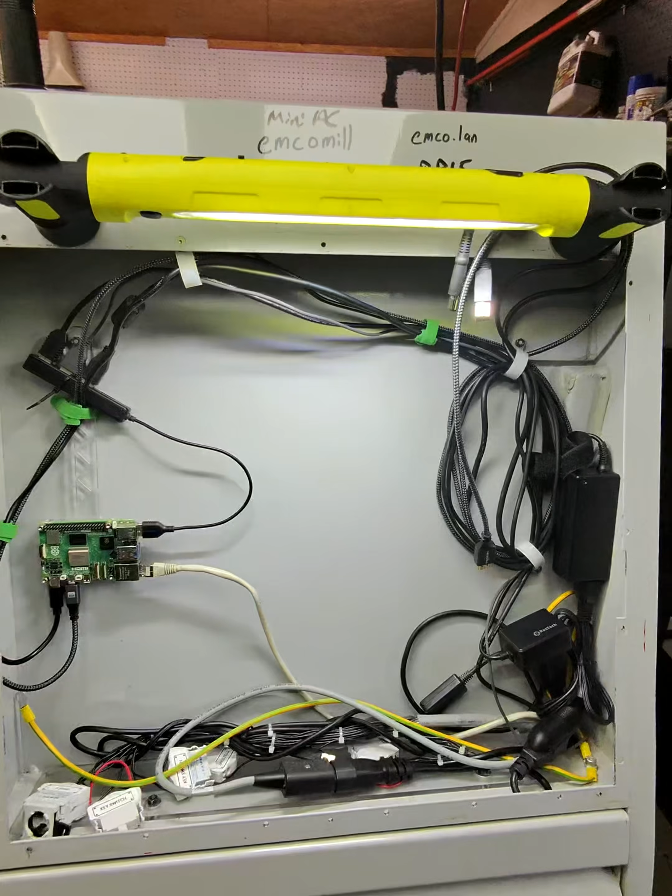Alright, so cleaning up the cabinet up here still. I opted to put the Raspberry Pi actually on these studs here. So these two left studs, I kind of made this little mount out of clear acrylic that goes between to mount it. You know, the button control panel is kind of about here.

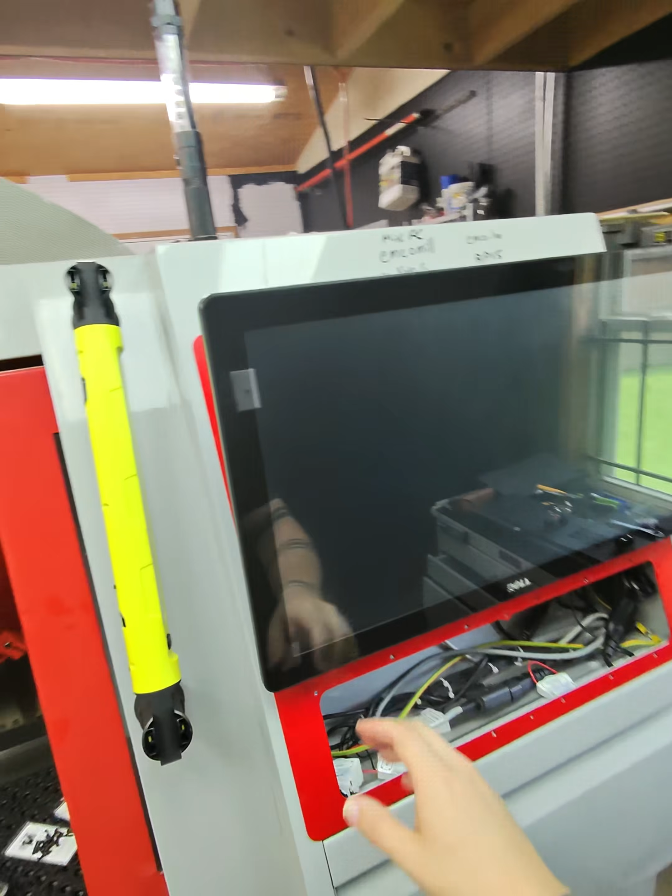Alright, I got the panel and the monitor back up, and then this cleaned up down here really nicely. It took a lot of those cables and stuff, and they're now hidden way up in here, and the Raspberry Pi is right up in there. So I still have access to get in there, adjust cables and stuff as I need to, and I can totally reach up in there. There's still plenty of room.

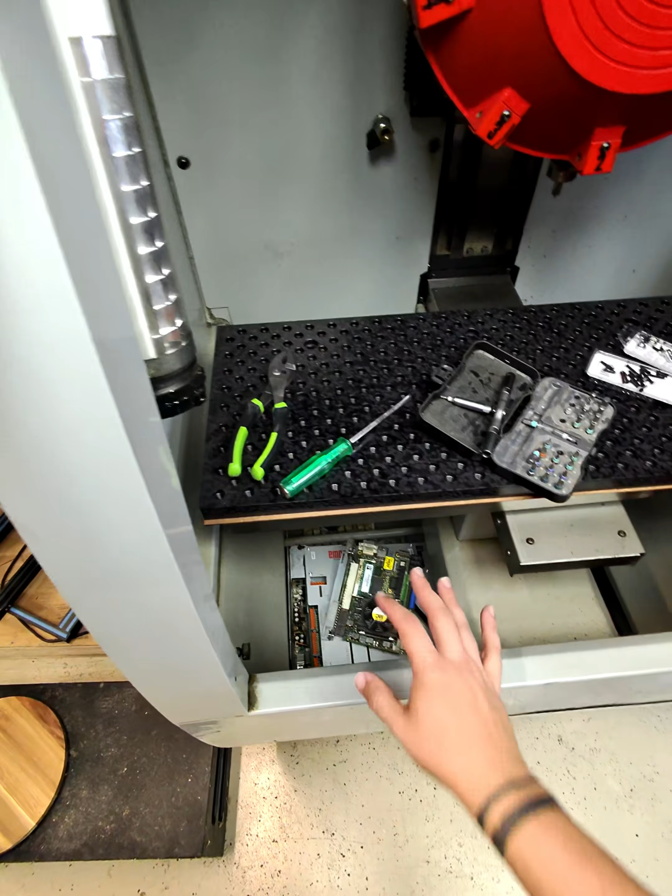I think it's time to start pulling stuff out of the chip bin in the coolant tray. I've just been storing the ATC and all the broken parts that I've taken out of this thing down there, just because I haven't had a better place and they were out of the way and out of the dust. But I think it's time to pull that stuff out, just in case this machine moves and fucks any of that up even more.

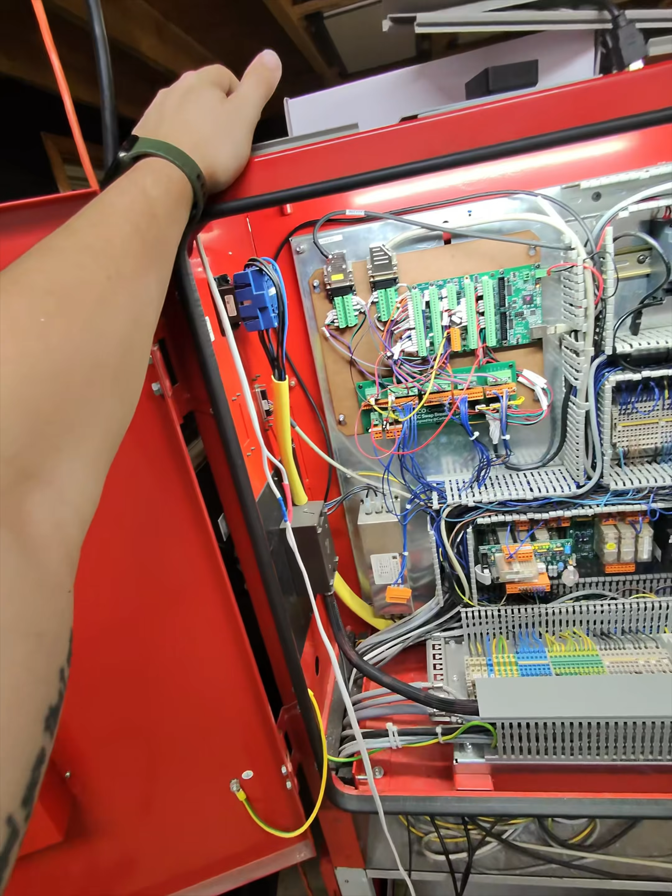Alright, so this one's going to be a little noisy. But this is probably about the 16th time I've rewired this Mesa to this guy. This whole PCB needs to get redone. I've missed some traces and stuff, so I need to do a version 2 of that board at some point. I'm bypassing all of the safety stuff, so the door sensor, the stock e-stop, the agreement button, and that kind of stuff, and I'm just hardline powering what it would consent to fire up.

The stepper drives and the spindle drive, I haven't really touched just yet, but I've got the 3 contactors going here for the stepper motors fired up, and I also had the lube and the coolant one fired up earlier, but I disconnected that just so it didn't kick on. And then over here, you can see I kind of buttoned this up. I didn't put this in there and just got the stock buttons dangling here.

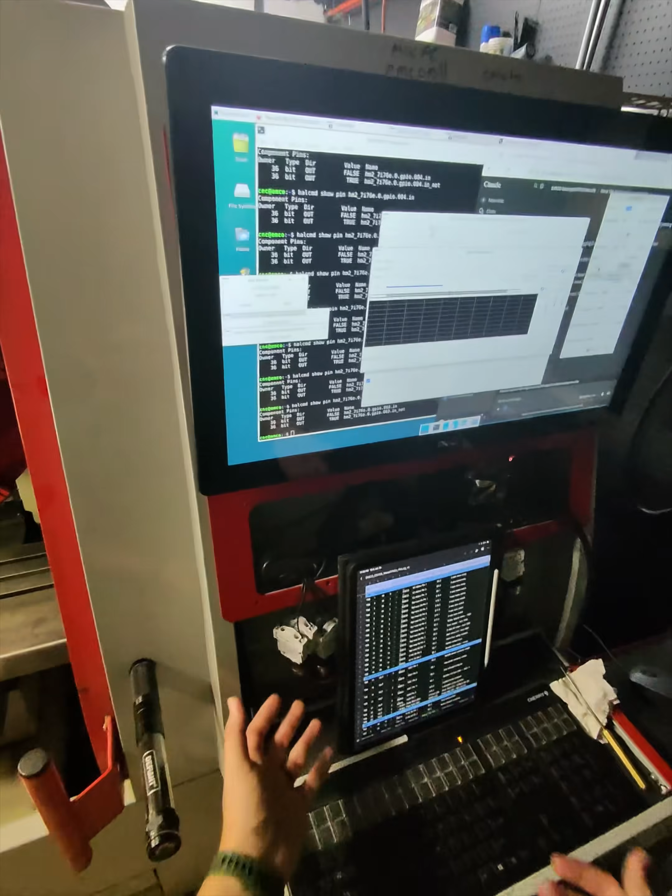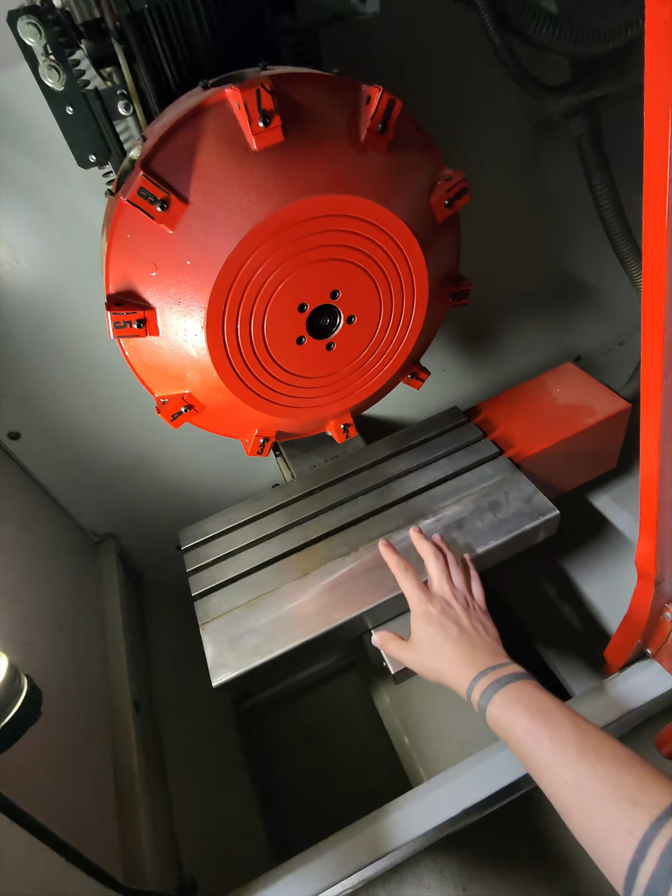But the best part is it moves. It lives. I've been troubleshooting. I got the right calibration in for the X and the Y axis. I think the Z as well. The thing is the X and the Y work. I've got them inverted correctly, they go in the right direction, so positive, negative, positive, negative. The Z, anything I do, it goes down. It never goes up. So that's the next thing.

But I'm so happy with this. This is about 1.5 years in the making. Machine is moving now. We are getting there. So I got one more axis to figure out, and then the limit switches, the home switches, is what I was trying to figure out, and they're a little funky, so I need to dive into that wiring a little bit more. That'll be the next steps, maybe this weekend.

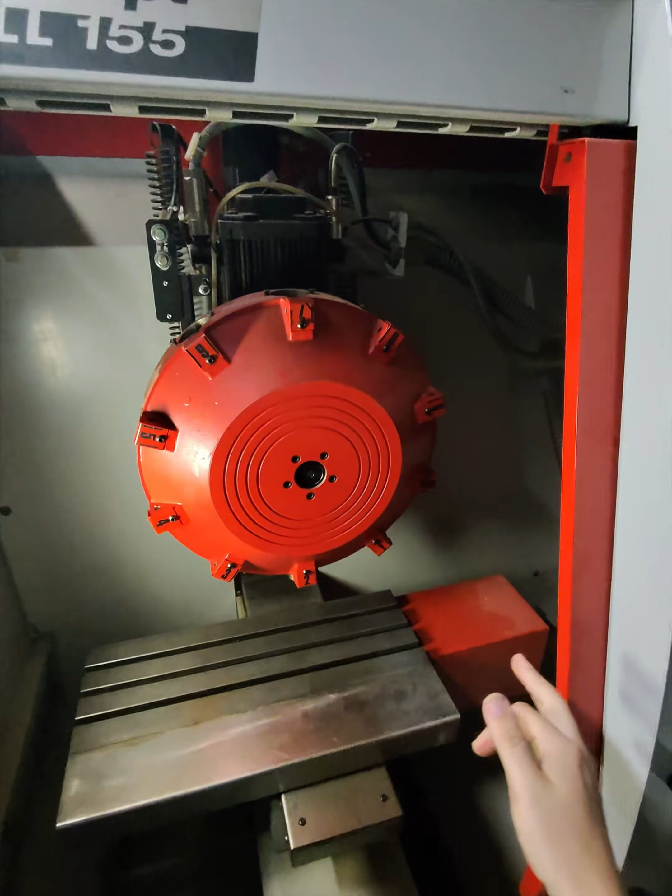But I'm so happy with this. This is a moving machine. That's telling me all 3 of these stepper drives and motors are all working just fine, which is huge. And I had it controlling via LinuxCNC. It's just a lot easier to show it in the PnCconf, because obviously you can repeat.

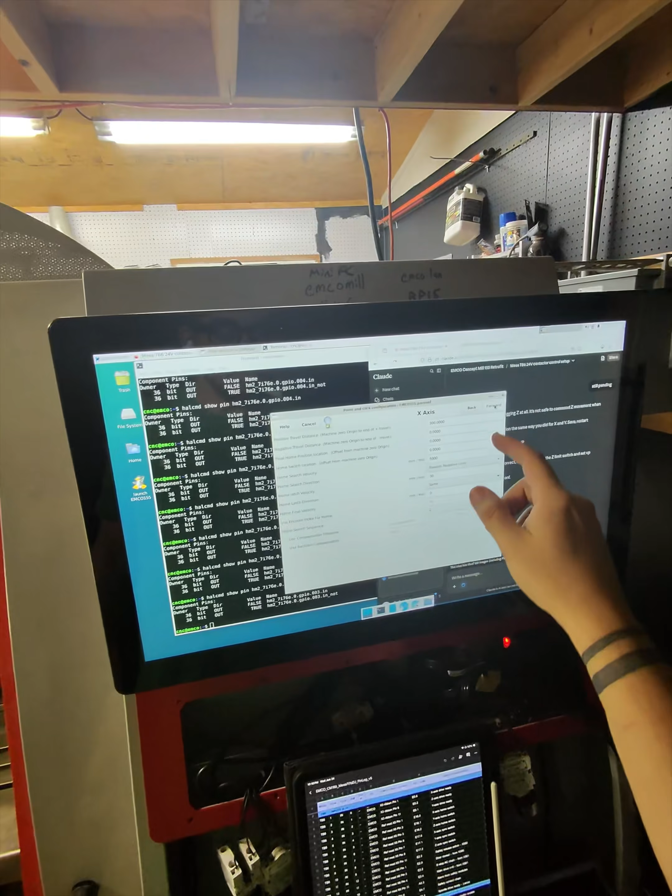And then if I get out of that, just to show you, I'll go into the Y. Touchscreen's working great. Where am I at? Y. Let's enable that. Oop. There's the Y as well.

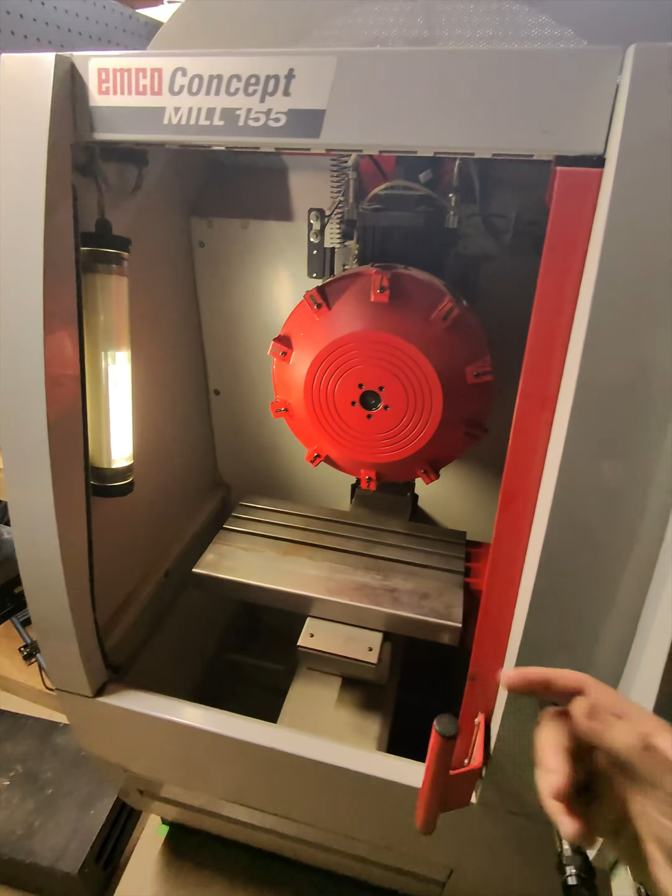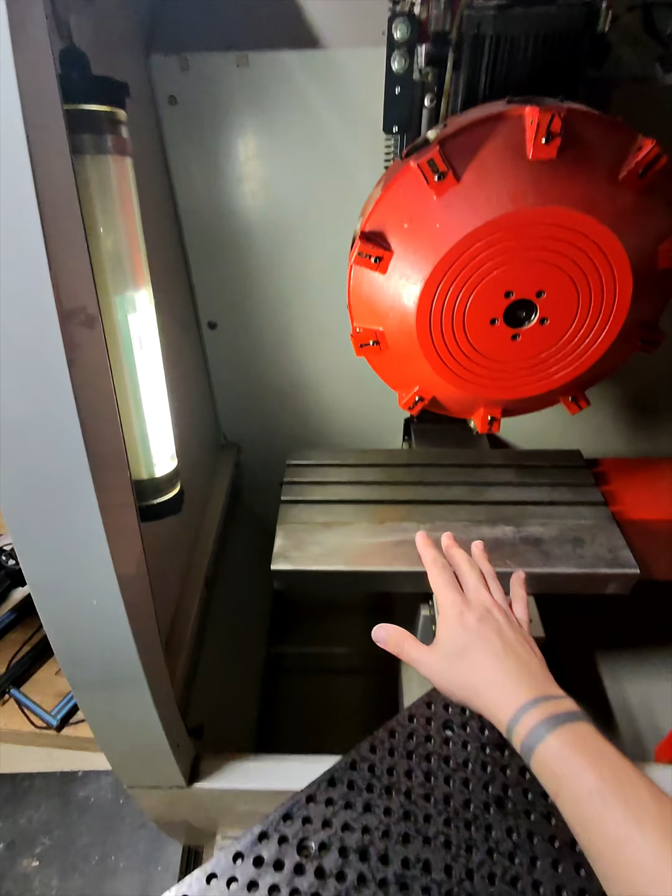Now that I got the X and Y moving around, this actually confirmed finally that my Tormach 770 fixture plate that I bought from Saunders Machine Works will work in here with the travel limits that I have. I can get it bolted up in here. It'll overhang on the right, totally fine. It'll go over the X-axis. It'll butt up nicely to the front and back, and it'll fit, and I'll have extra workholding areas outside of the machine travels, which would be nice.

So excited about that. And then back here, I've got a little bit more cleanup to do.

You can see I've got some wires that aren't run as they should be, but I'm getting there. I've got 98% of this ready to go. There's a wire I had to jump over here, a couple wires here, and a couple I've got to run down and then up to the front of the machine here in a minute.

And then what I'll do is I'll pull this back out, actually swap that to an acrylic back plate, and then add some terminals and zip ties and some cable management to this, and then I can button all this stuff back up once I'm happy. But we're getting there. Excited.

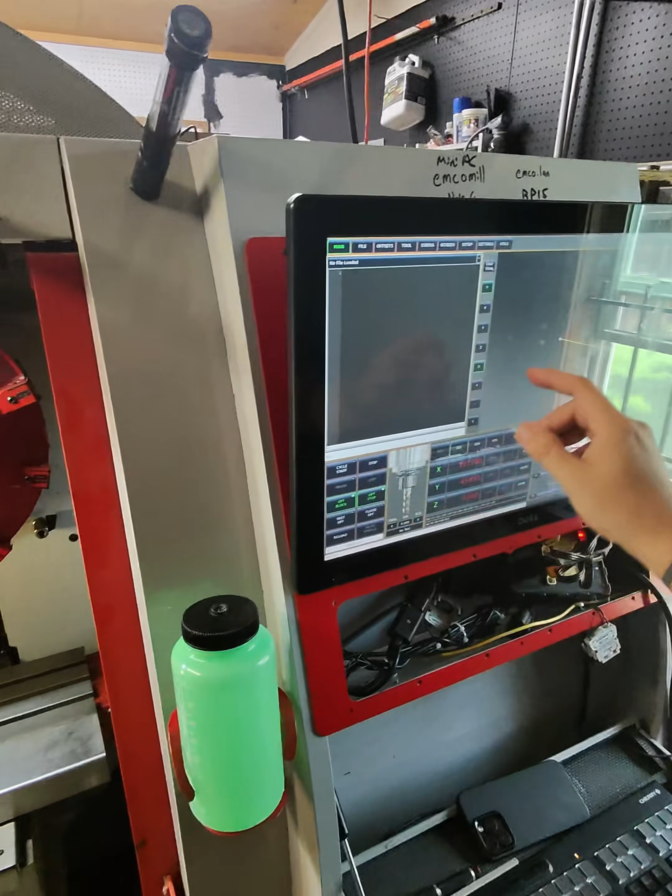Alright people, we are getting there. We've got X movement. We've got Y movement, and they're pretty damn zippy. This is actually slowed down. We've got Z movement, right? Best part is we've got homing on the Z with the latching. It's going to park up at the top here on the home switch.

We've got homing on the X with latching, and it's going to park in the middle. And then we've got homing on the Y with latching, and then it's going to park up front. That's pretty sick. I'm excited about this.

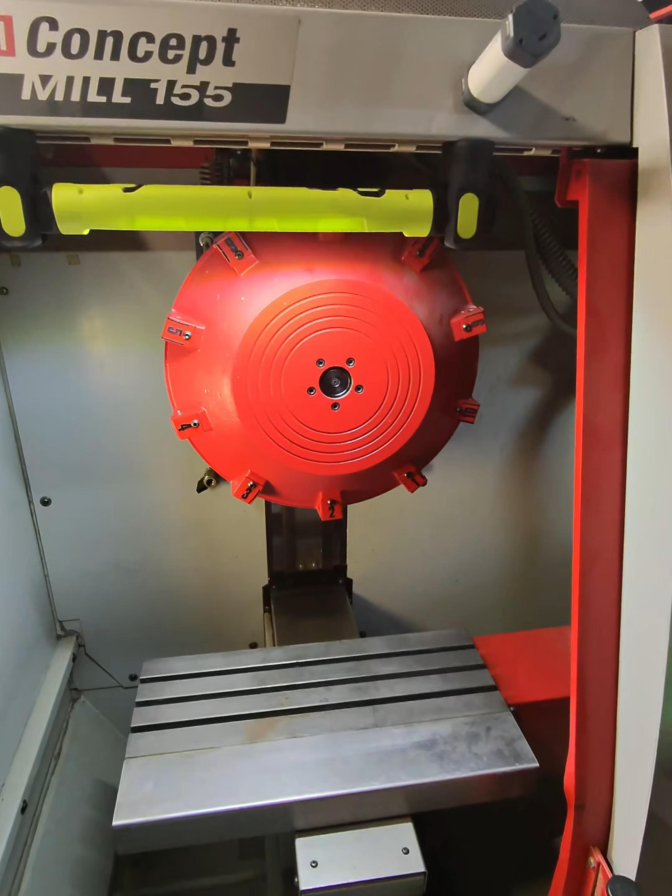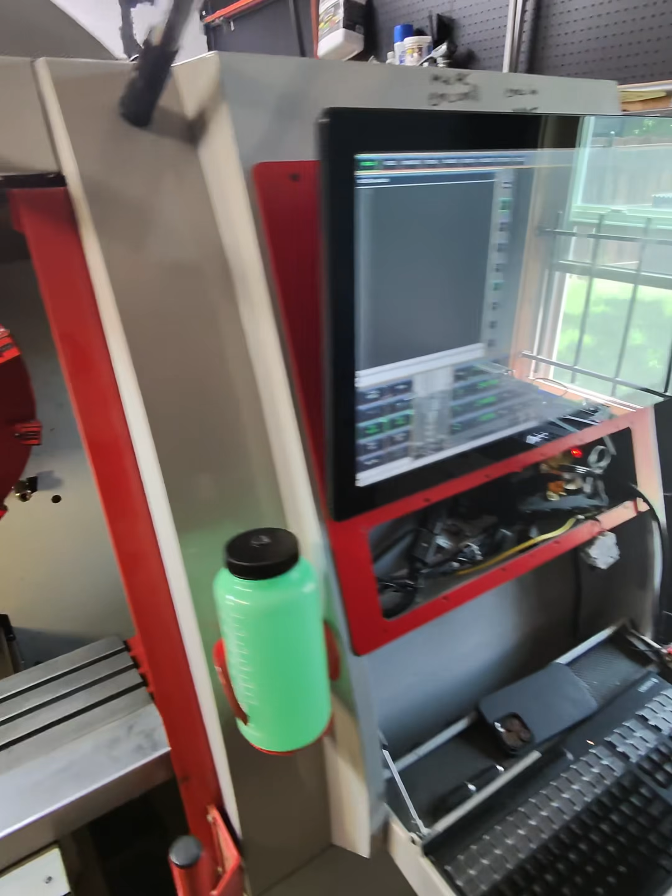This is awesome. Next thing I'm working on for safety is going to be the e-stop, the physical e-stop. While I'm there, I might do the cycle start and feed hold buttons as well, just so I'm running all those wires at the same time, because I'm running new wires to the back. And then I'm going to move on to the spindle, get that going. And then turret. After turret will be buttoning this stuff up with the Streamdeck again, and then once this is buttoned up and all that's going, I think we're ready to cut and do stuff.

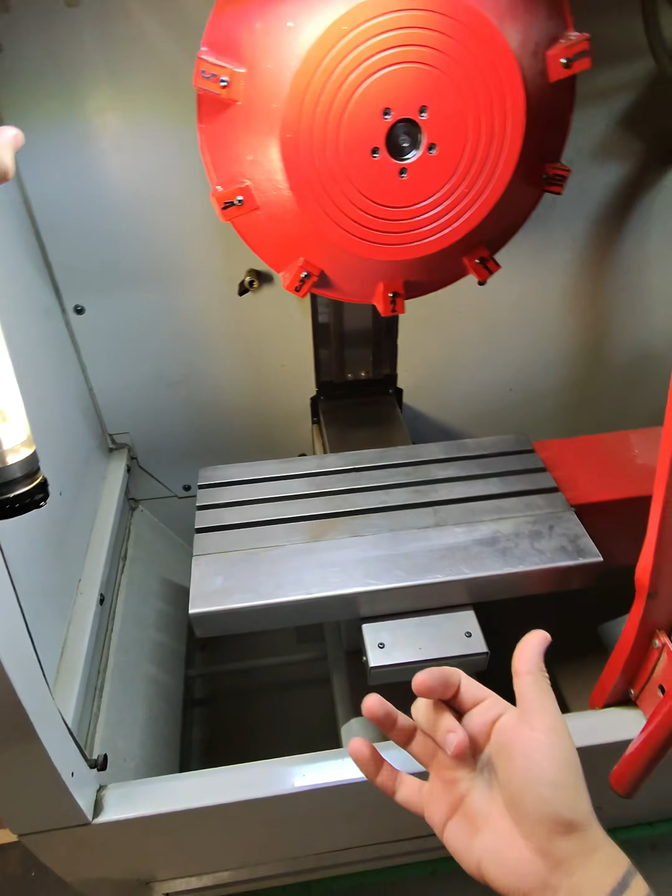The coolant lines are all run. The coolant contactor has kicked on the pump, so I think that works. I've heard the pump for the lube back down in there kick on, so I just need to flush that out. Kind of both of those, actually. I don't have any coolant, so that'll be down the road. But yeah, we're getting there. We're almost ready to see this thing cut and make some chips.

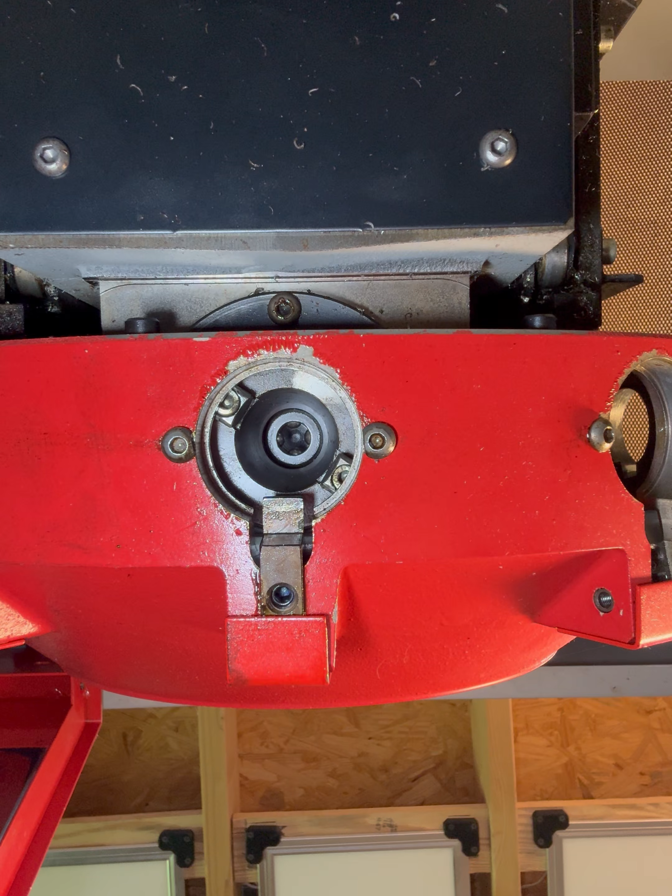So here's a side quest I've been going on. Originally I had my tool holders all in these little 3D printed holders. These are a 2x4 Gridfinity. I could do a multicolor and all that stuff. The experiment was there, but that's not a long-term plan. That's not a great idea. It just wastes a lot of space in theory.

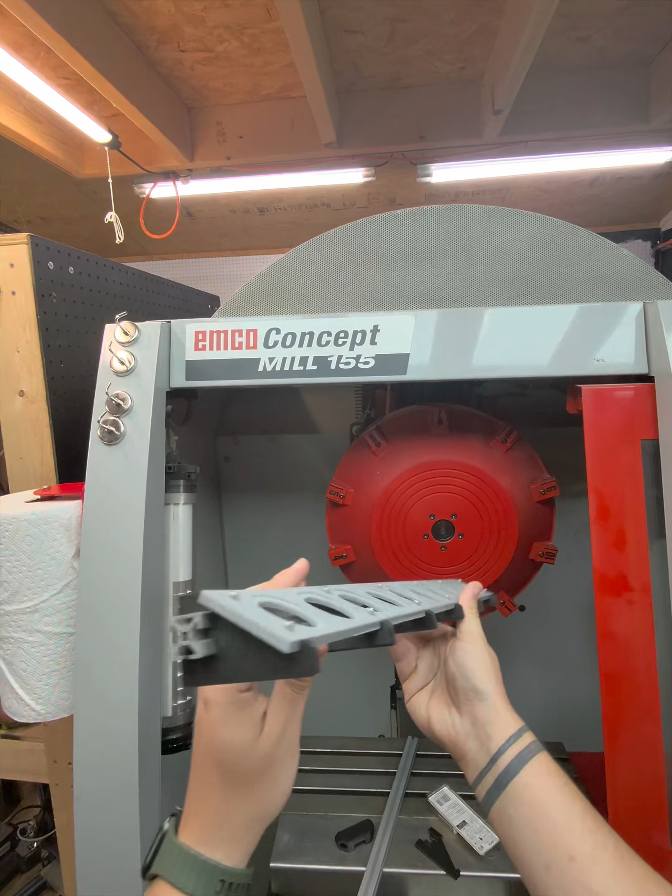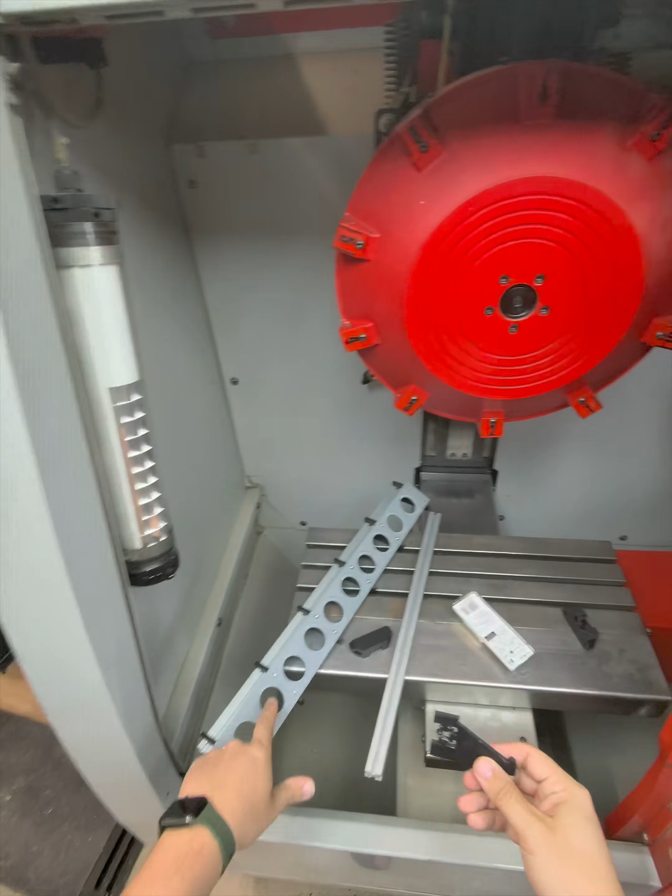So I've been kind of going around and designed up one of these guys here for my tool holders, right? This is just a standard 2020 extrusion length, a custom little support bracket with the cutout here, top for this acrylic here. I think the stretch I did was 5 or 6 of them, and then some custom little end caps there. And then the way this guy works, you can kind of see I've got 2 over here.

All my walls are pegboard, so I spaced these out to fit onto the pegboard. I've got 2 of them mounted up there, just with some number 6 drywall anchors. Got these spaced enough, so I've got the stock 10 tools that my machine came with. These are 10 BT30s that I got after the fact that are ER20s, I think. I'm going to do 10 more, I think ER16s, just so I have some smaller ones to work with, or maybe 5 and something else, room to grow.

Inevitably, 10 of these are going to be in the machine, so one of these racks will be empty, so the goal will be to have room to grow up there. I've already got version 2 of these end caps planned out, so I might change this a little bit, but these have been up here for a couple days now, and they're pretty rock solid with that amount of weight on it. So yeah, there's my tool holders. This has just been kind of a design side quest.

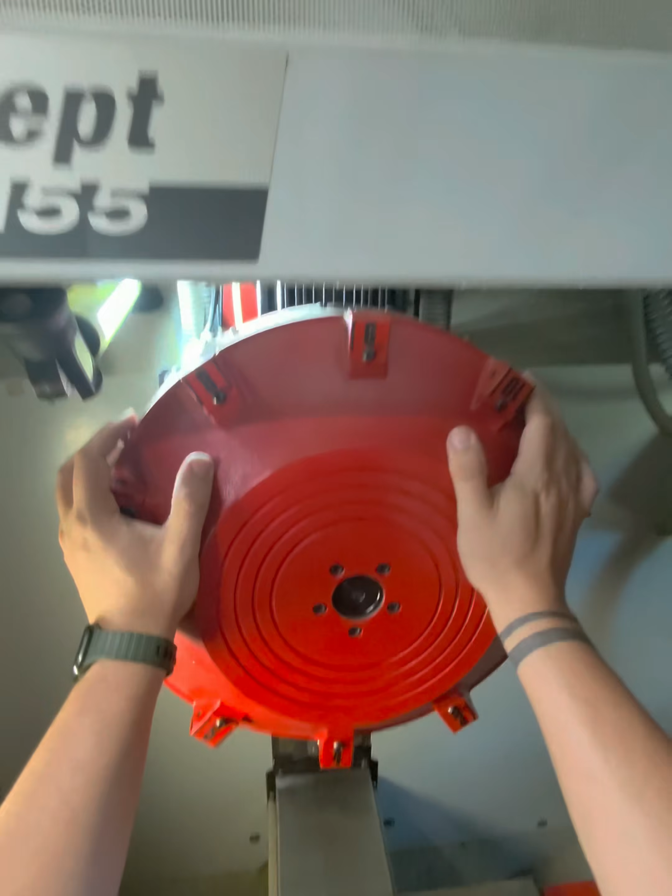The lower ones are engraved in, and the Emco sits in there nicely. The big BT30s will need to get modified, all of these BT30s, to actually fit the Emco. Once they're turned down to size, the bearing slapped on there, these will be ready to go. But future problem, I just wanted them out of the box, out of the drawer, up on the wall. So yeah. All right, a little bit more progress. Check this out. The turret moves.

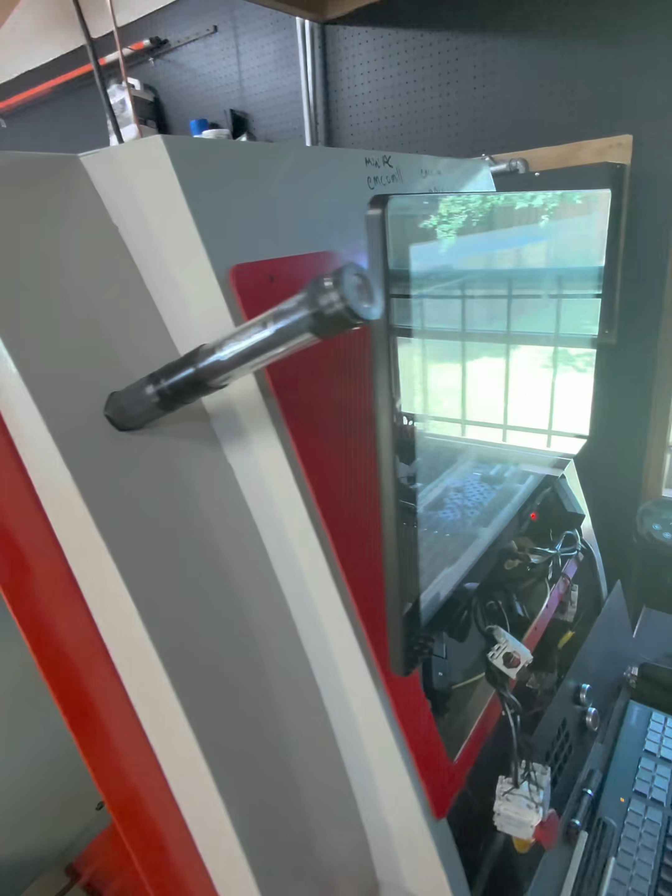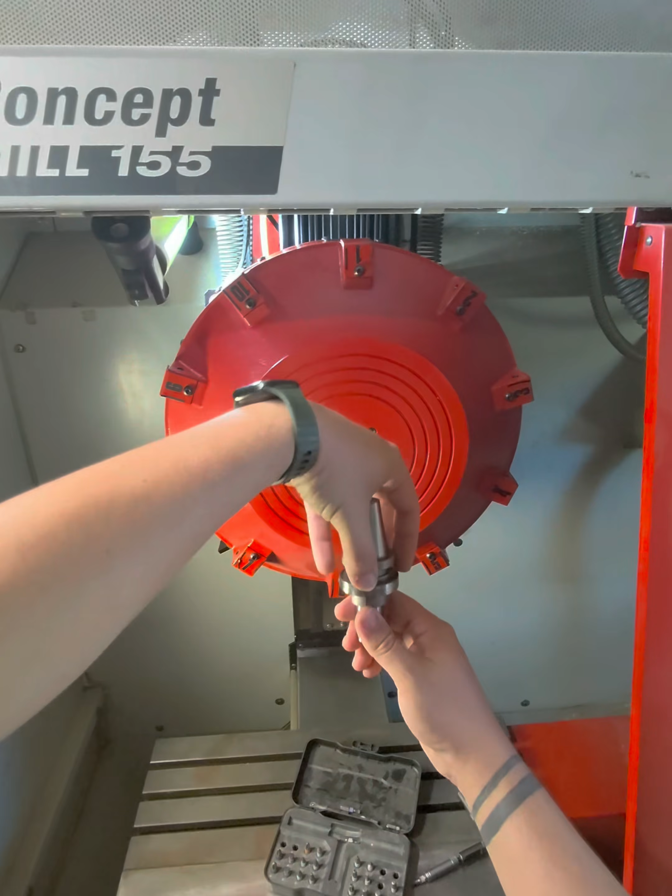Yeah, so there's some slop in this system, I guess intentionally. What I learned, let me stop that. What I learned is the spindle, right, it goes up and down, and it engages into the turret, right? Each tool holder uses the little drive dogs, the drive keys. There's one in the turret, there's one in the spindle nose, so the little bit of slop in the spindle needs to come in and kind of align itself to that.

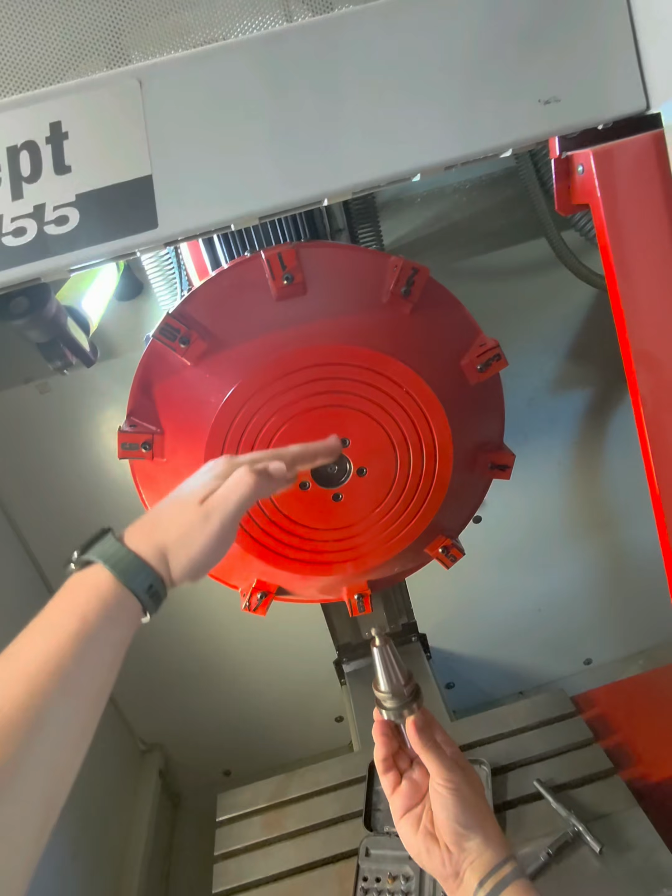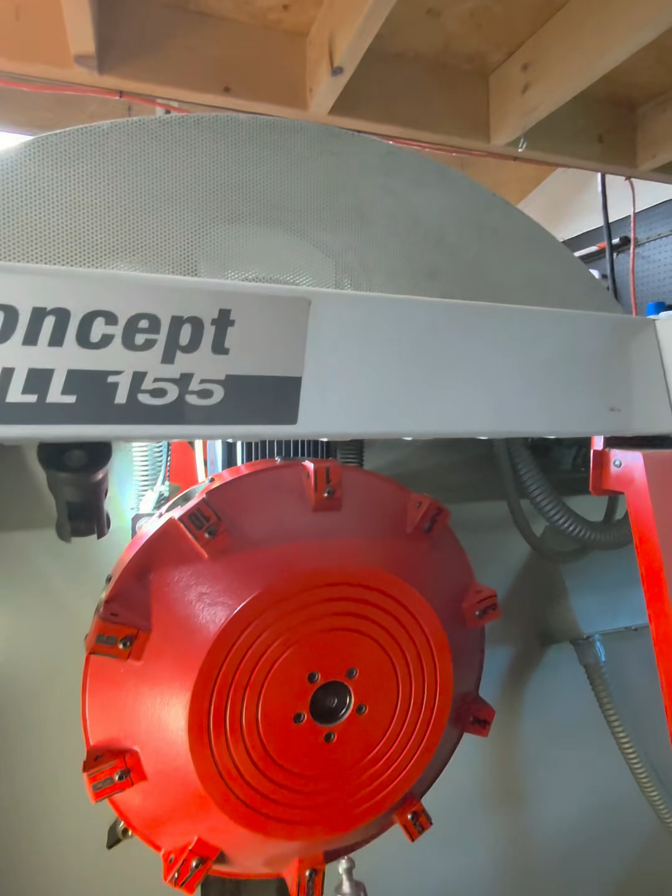So then it's a mechanical drawbar. It's not actually actuated, it's just spring driven, so when it goes below the home switch, it releases the Belleville, or yeah, releases the tension so it locks onto the tool. When it goes above that, it presses in and releases the tension there. And then it goes above that, and then the spindle lifts up. The pinion gear on the top of the spindle meshes into this.

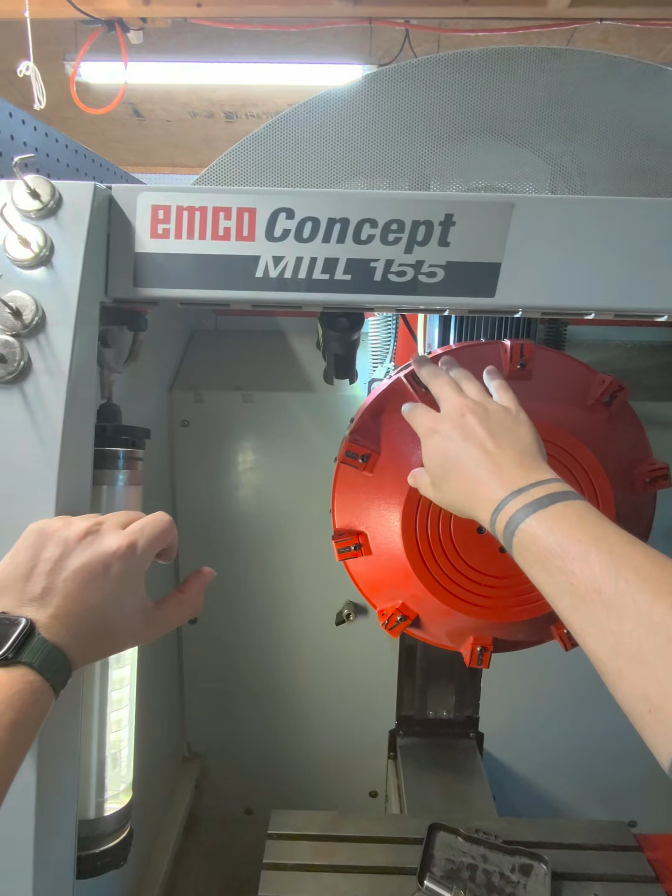So that took a little bit of troubleshooting. I think this makes sense. This doesn't really make sense to me, but the turret is moving. Next step is getting the turret sensors going so it actually knows where it is, what tool, because now that I just did this, it has no fucking clue what tool pocket it's on.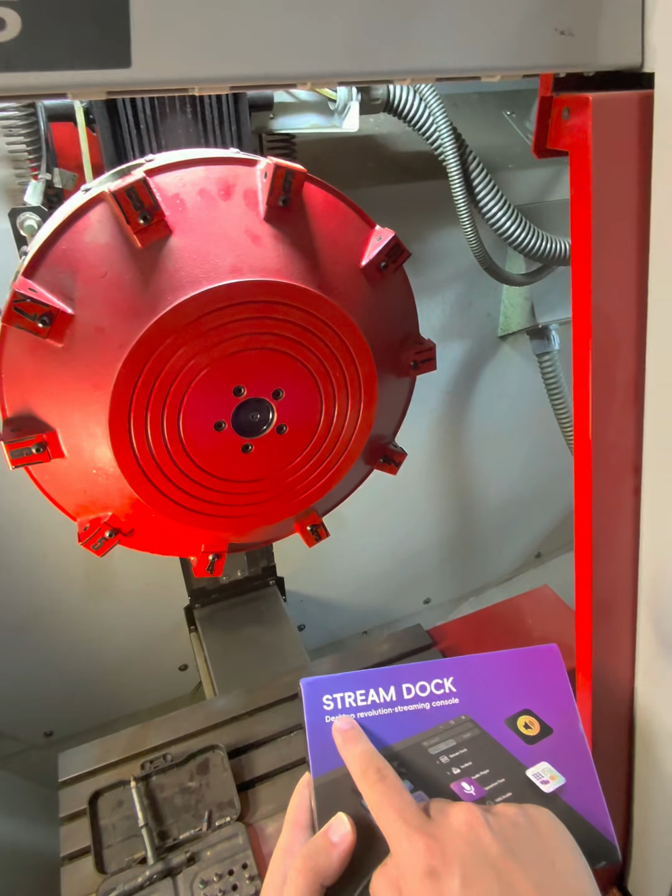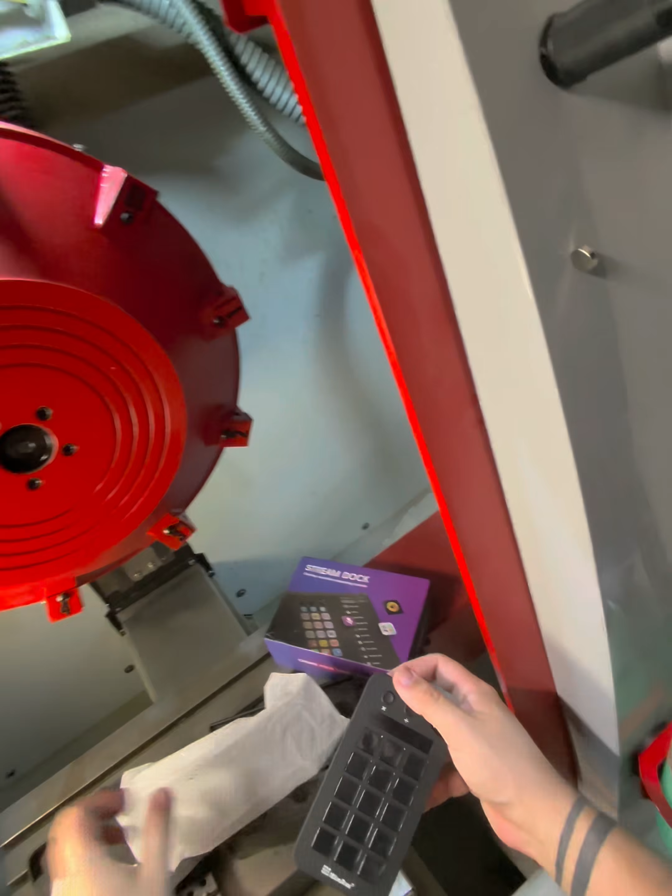Alright, new toy in the mail. This is the Stream Dock, not to be confused with the Streamdeck that's going to go here, the Elgato's. This is straight from AliExpress from China. This is the Stream Dock N1, I think. This one is actually going to become, look at that, a little handheld pendant with the little USB on top.

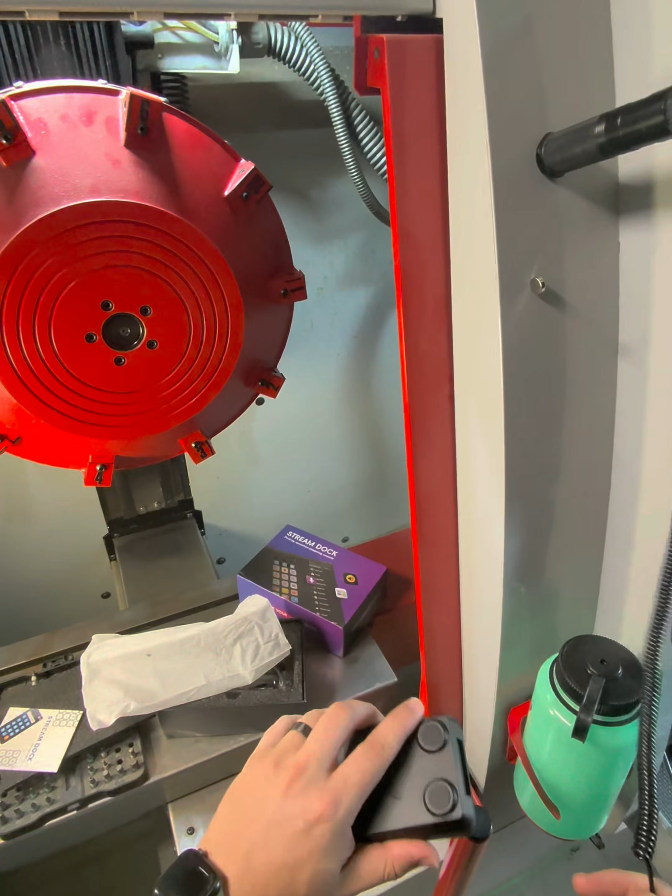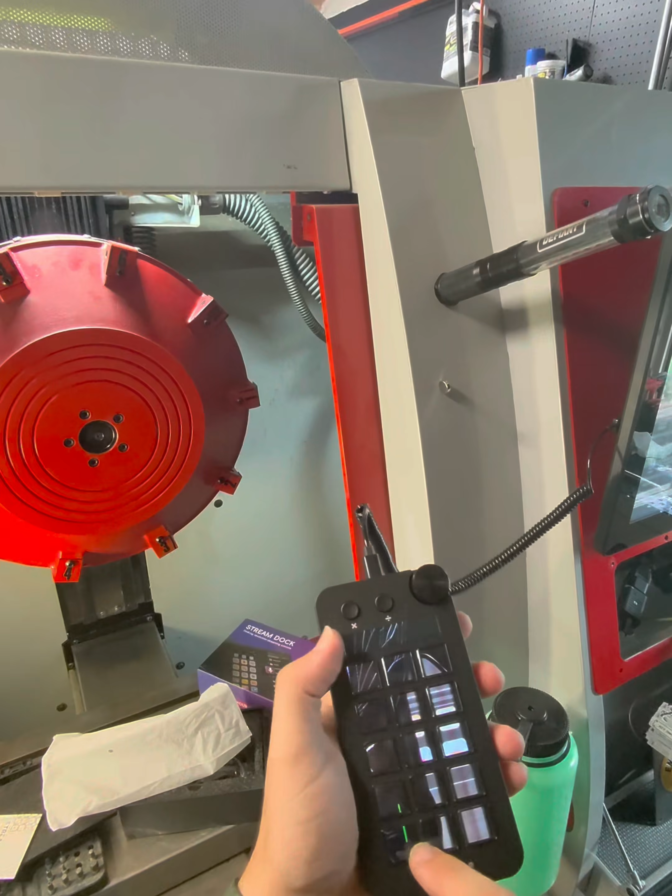With the same amount, the 15 buttons plus 2 more and a full mini display here, and a jog wheel button combo with indents on it. That's a nice in the hand feeling. The bad thing, when I plug this in, the screen back there is broken. So I have a refund of this already processed and a new one of these on order from China. Yeah, you can kind of hear the glass in there kind of shaky, but this feels kind of nice.

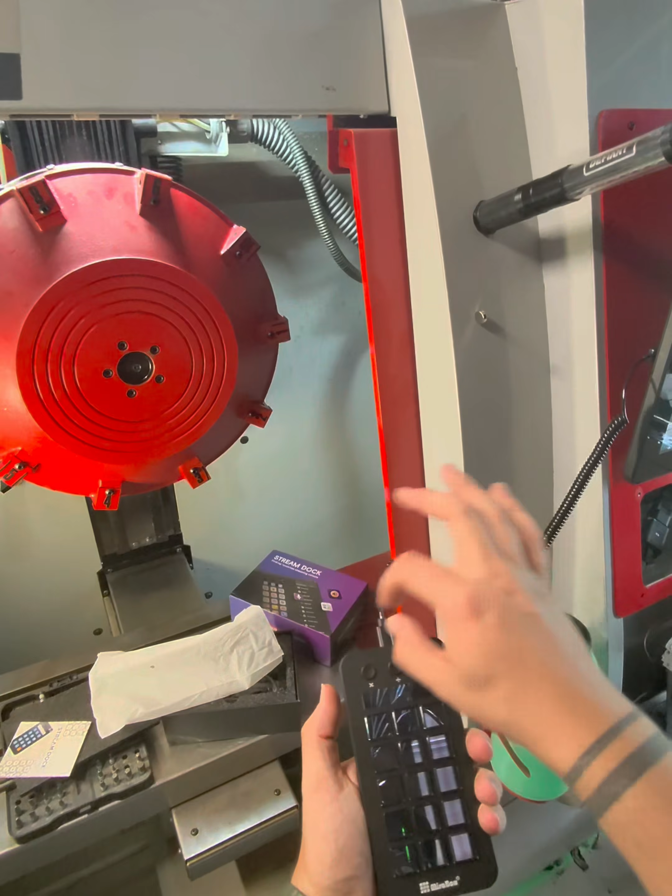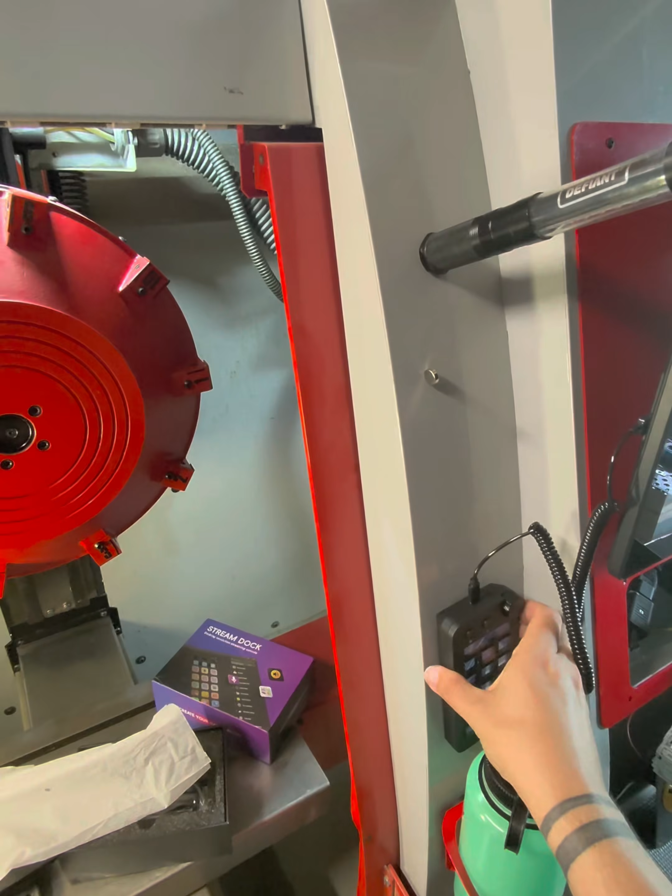Obviously it just can't take a hit, so I think I'm gonna do like a little TPU 3D printed bumper that'll have a little indent for your hand to make it a little nice. My goal is pull these little rubber pads out, put magnets in so that it can stick right there where my water is, right? And then with this little coily USB right to the monitor, this is going to be a nice little spot. Jog wheel, XY, blah blah blah.

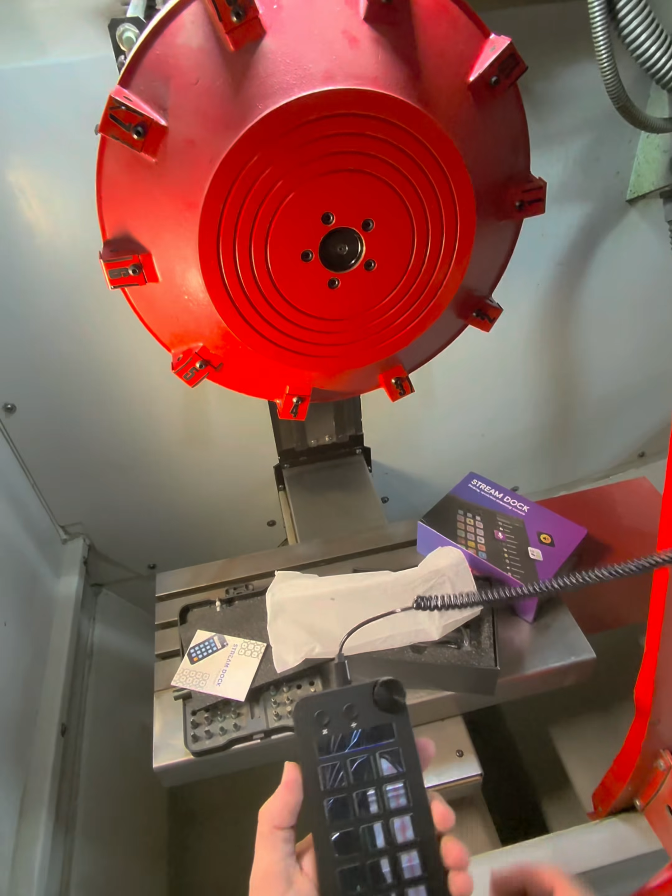This is going to be nice, if I can get one that's not broken. But hopefully that'll be a week or two. This one came within a week and a half, I think, so shouldn't be that long.

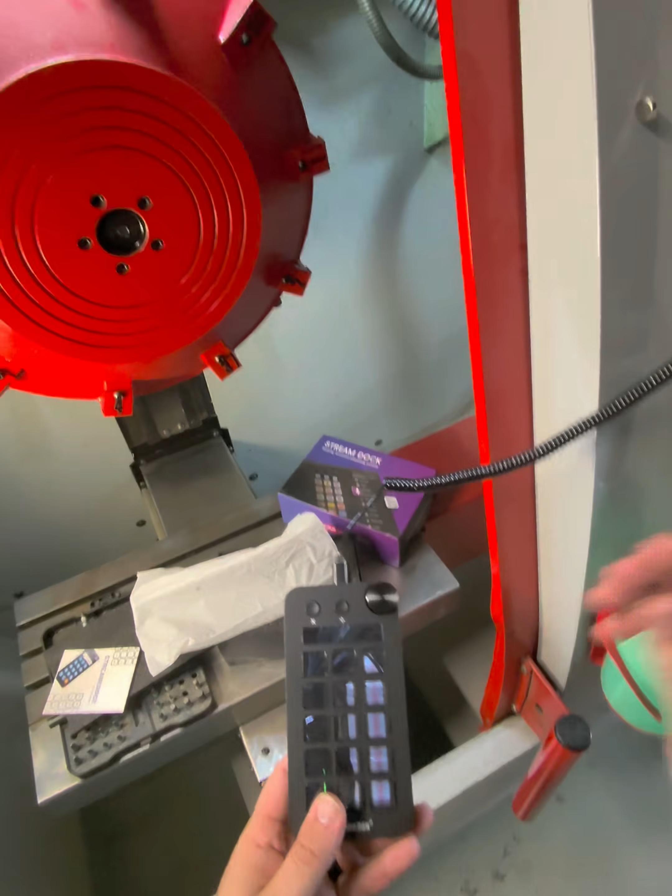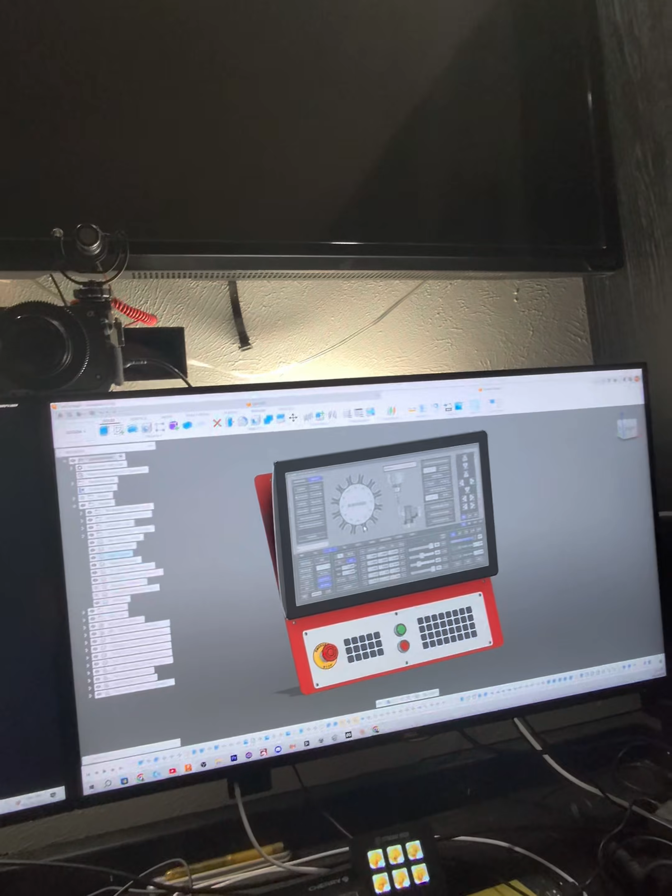So a little late night thought. I was just messing around in Fusion, and I was like, man, I really wish I had a 3D model of the machine so I could slap this on there, or go into the CAM side and get the machine builder built out in there. So I emailed Emco UK at like 11 o'clock last night, and then at 4 in the morning my time, they emailed me a full STEP file of the entire machine.

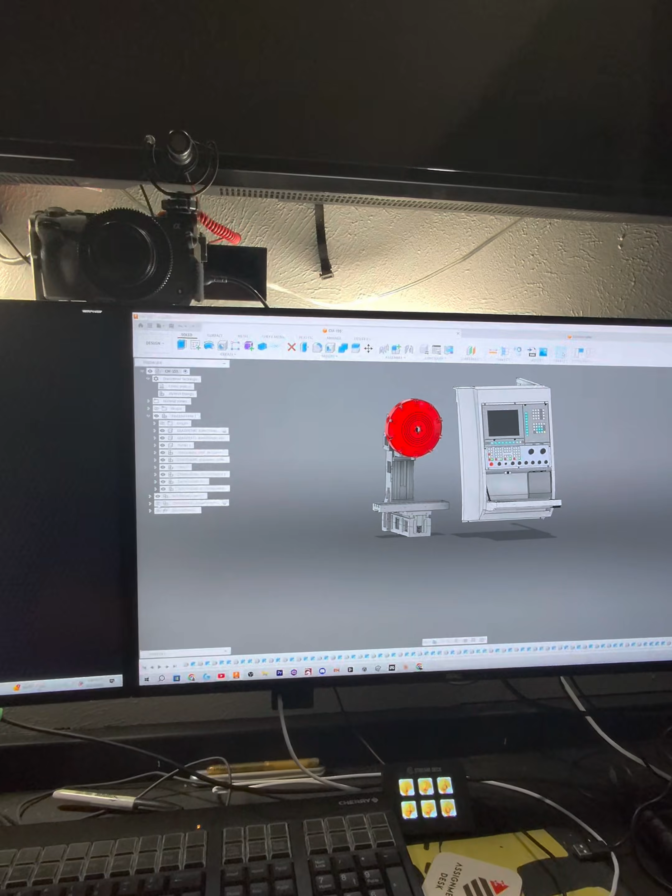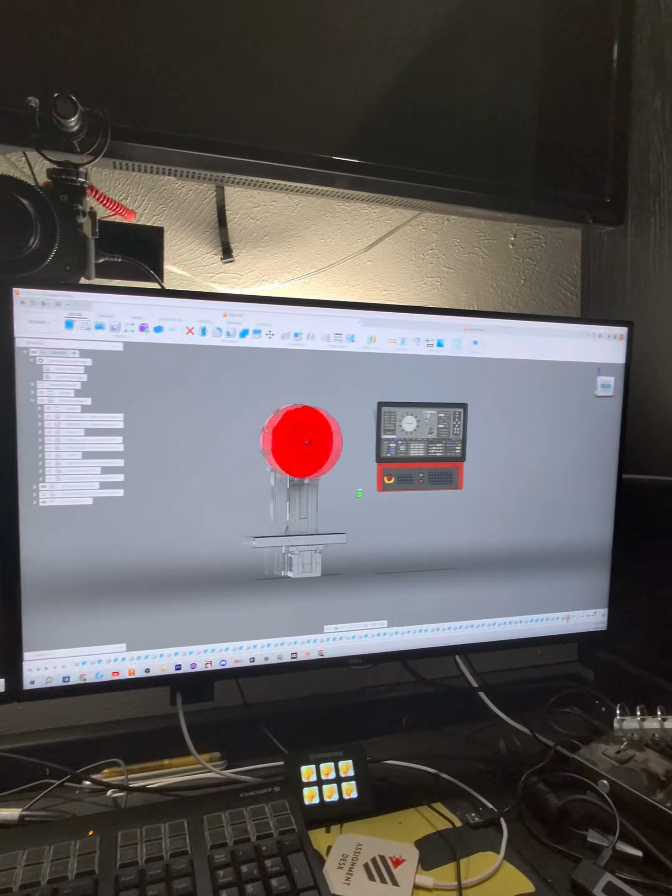That's kind of broken up in a couple different things. You know, the mill itself, all the sheet metal, the control panel side of things. And I can actually go in and, right, here's that stock control panel. I could take that out, and I threw in my control panel for the machine, right? So this is pretty sweet. Pretty awesome of them. So if I take out everything else, now I have this with the turret and the bed to throw into the machine builder and build that out.

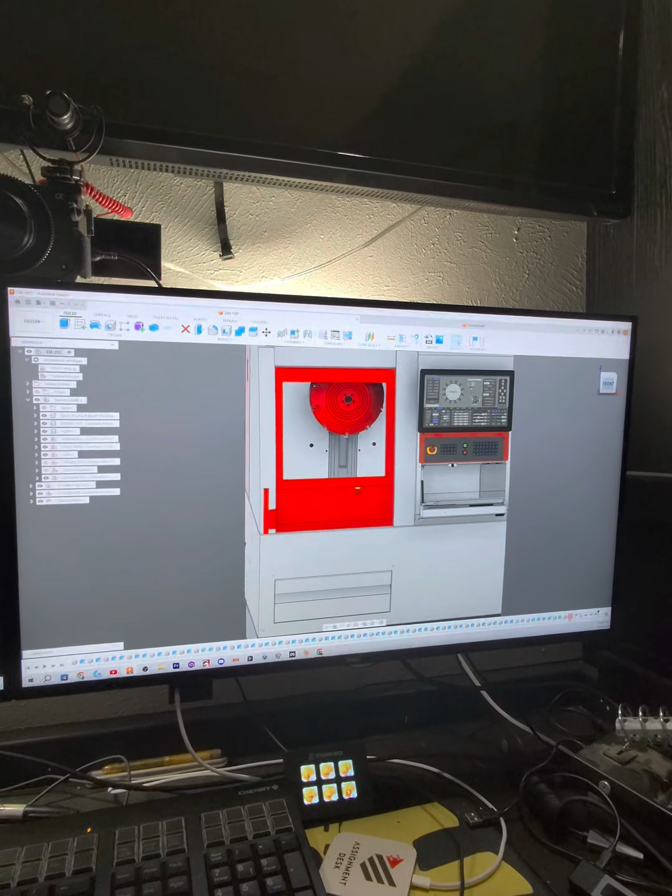This is awesome, and thank you Emco for being willing to share this file, and for sharing it so quick - it's insane. The only thing it doesn't have is the wiring, the electrics, the motors, that kind of stuff. It's really just the sheet metal and the castings, which is totally fine.

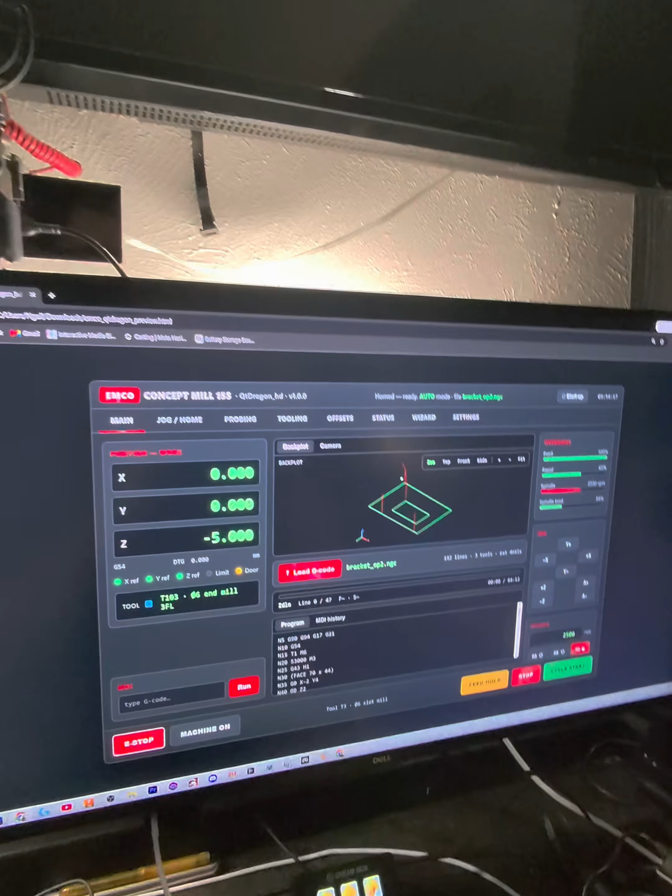It does have the coolant pump modeled in there, but it doesn't have any of the motors or the spindle or anything. It has bearings and stuff, which is pretty cool. So thanks, Emco.

Alright, so I've been playing around with my friend Claude AI, and I've been coming up with this new design for the GUI, the QT Dragon kind of reskin. The thought is I'm going to strip a lot of the buttons off of this screen, off of the touchscreen, because they'll go down onto the Stream Docks.

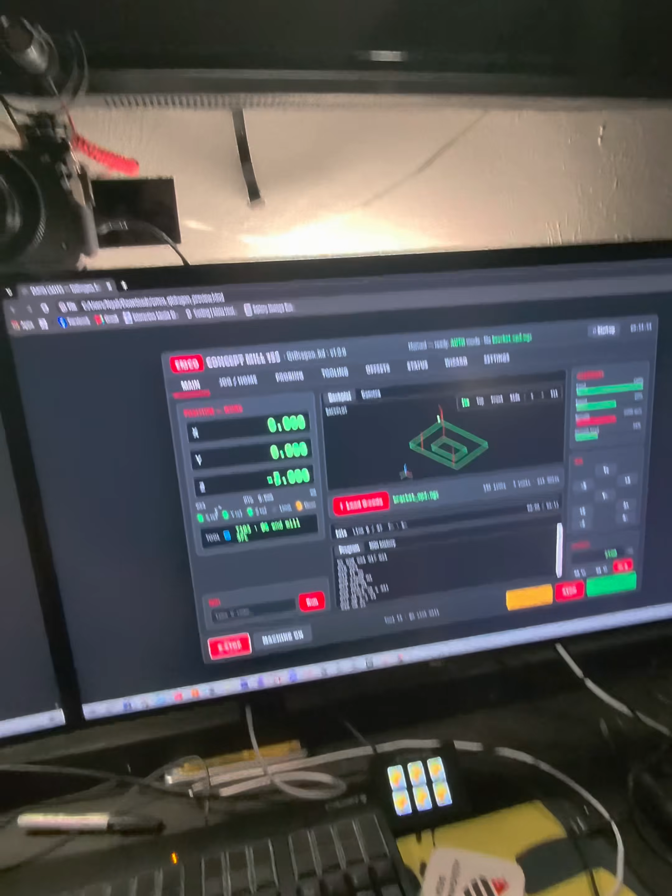So there's going to be some limited button presses up here with some basic functionality buttons still up here. This is kind of the main home screen - the DRO kind of stuff, tool and what tool's loaded, some MDI control stuff, the G code with the MDI history kind of live toggled as I toggle between that, kind of a status one right here in the middle.

I can load G code, kind of the plot with the different views. There's going to be a camera view in here as well. The override kind of graphs and stuff like that. Jogging, spindle overrides, that kind of stuff. Feed hold, stop, cycle start, machine on, e-stop.

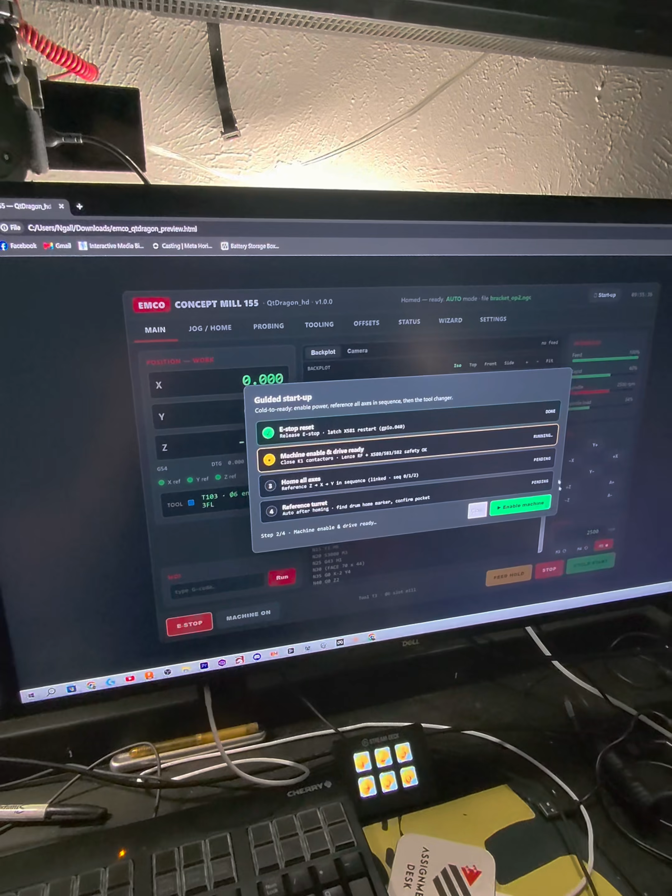We also built a startup routine, right? So it's going to wait for me, but it's all pressed in here. Reset, e-stop, alright, enable the machine, alright now I'm ready to home all axes. It's going to home all axes ZXY, and then it's also going to home and reference the turret as well. That way the machine, from one little GUI pop-up, will tell me everything is homed and everything's ready to go. I thought that was pretty cool. I don't know if it works.

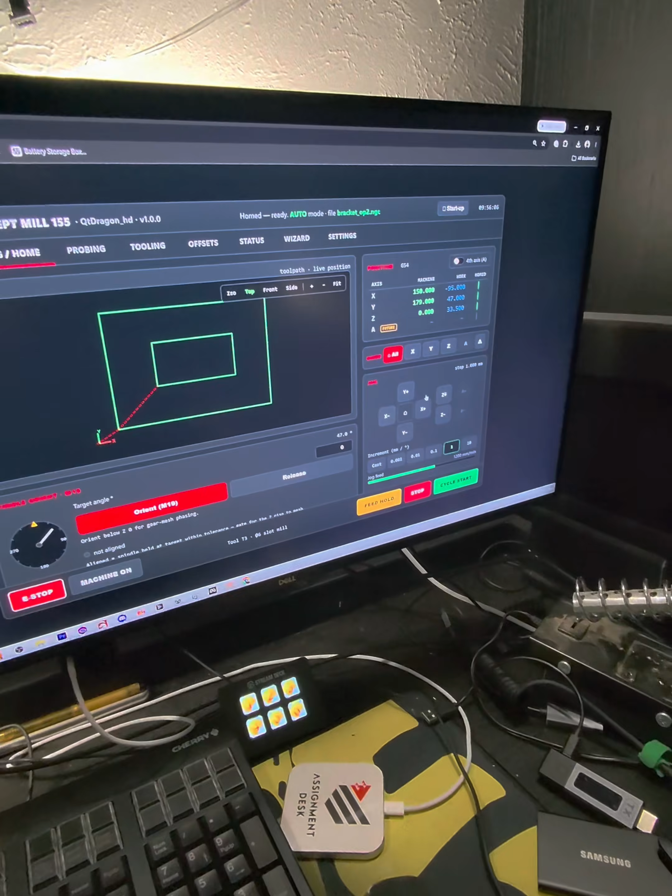Moving on, so we've got a jog home screen with a spindle orient, that kind of stuff here. Can home the axes over here, jogging with the increments overrides. This stuff will be down on that Streamdeck, so I'm not too worried about it not being on the home screen, just a bigger viewport as well.

Fourth axis toggle. Probing screen with some basic probing macros put in, like top, edges, corners, bores and bosses and stuff like that. Rectangle pockets with overrides and that kind of stuff. This isn't baked in yet, it's just kind of the idea is there.

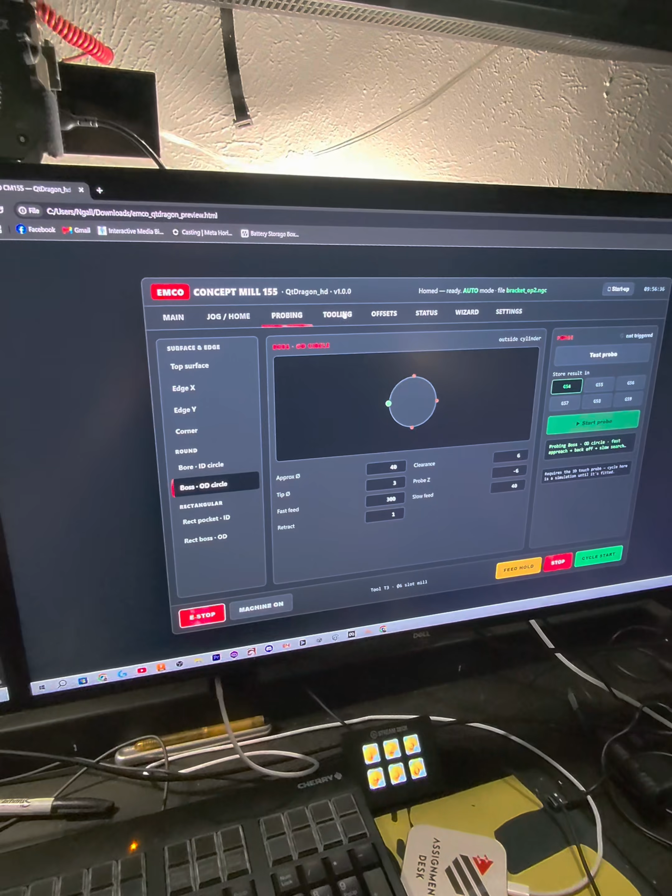This one I spent a lot of time on, kind of the tool drum slash tool library kind of all in one. You can see I've just got kind of 10 sample tools loaded in here. On the right, I can click on a pocket - it's going to raise, mesh, spin, down, raise, spin, lower, right? I've got a load, unload tool setting.

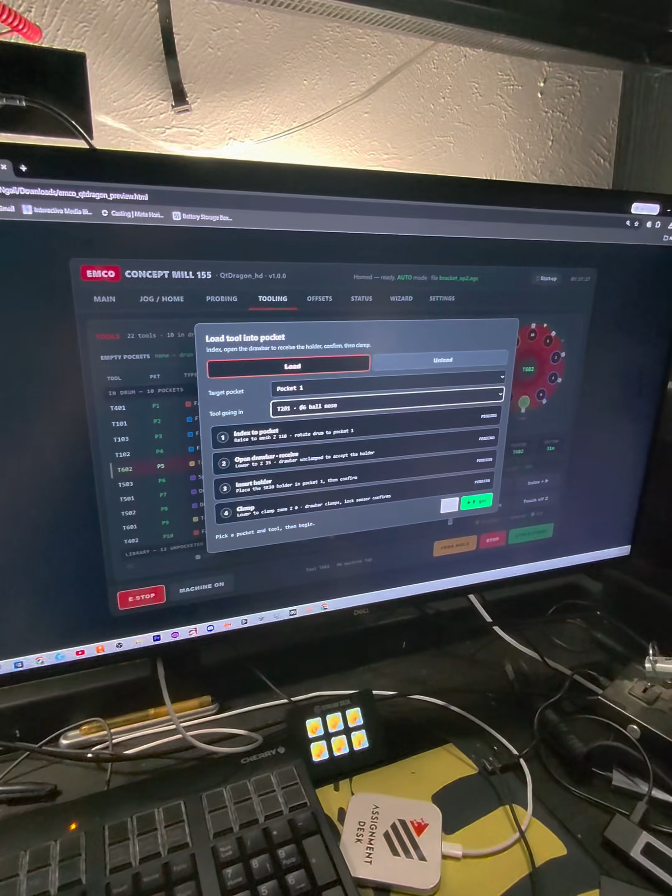I can pick a pocket, I can pick a tool, and then it's going to walk me through this. Alright, so let's go - it's going to index, it's going to open the drawbar and wait so I can get the tool out. I'm going to put a new one in, and that's like alright, it's in, lower it, right? Unload the opposite way, create a new tool.

And then I've got a color coding scheme in here as well, based off the tool number. You can see I've got ball, flat, spot, drill, etc, etc. And then I can actually play with the colors here as well.

So if I were to unload a tool from pocket 1, it's going to prompt me, remove holder, right? That one's great. Now if I go to a different pocket, I can see tool 1 is now yellow, so it's unloaded.

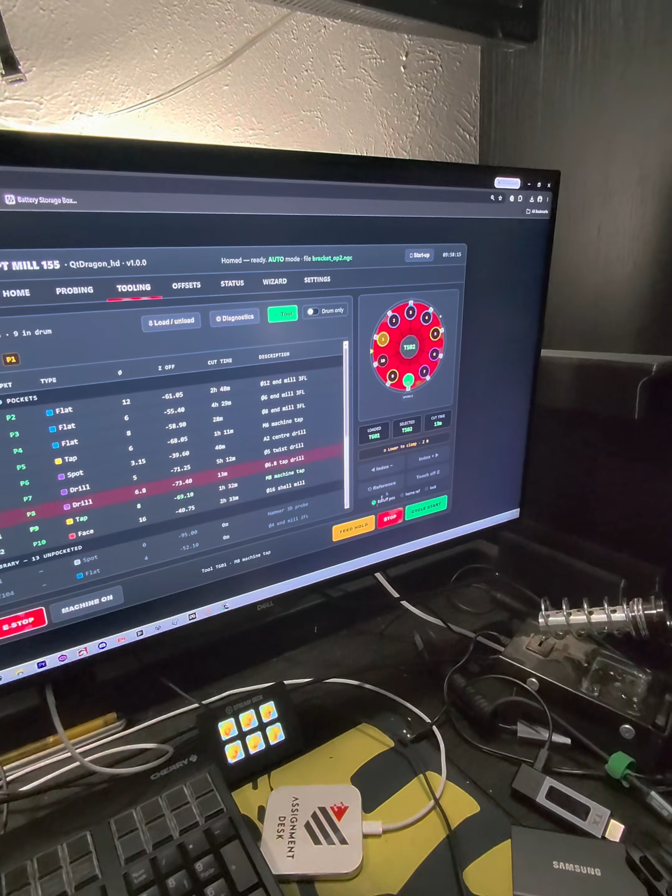I can index the turret here. I can reference touch off the Z, which I don't have a Z probe yet, but that'll be in here with tool touch off stuff, with Z heights and whatnot. These are just temp proxy tools.

Offsets page, G54, 55, yada yada yada. Kind of zeroing as well as in here.

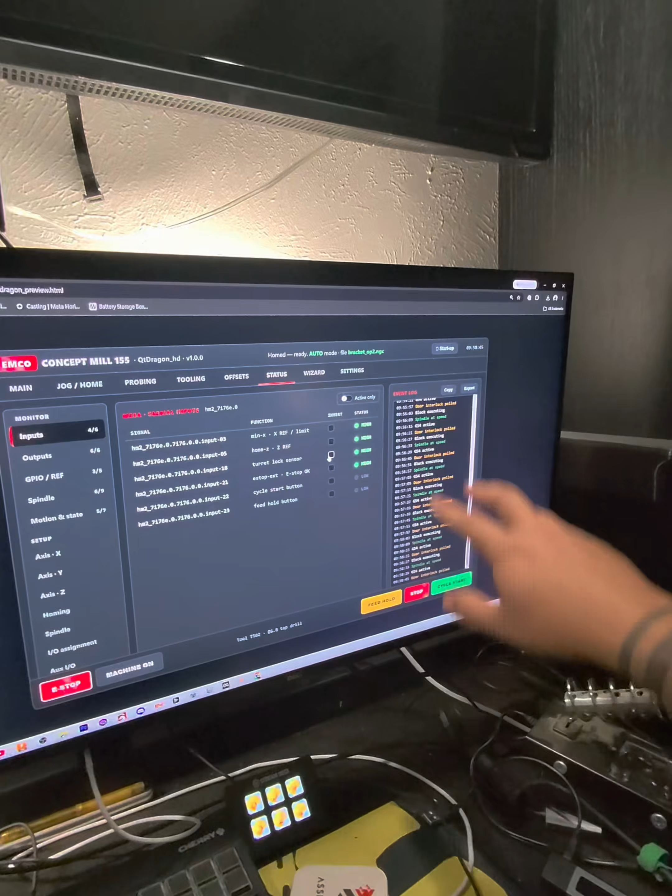A status page - this is kind of like a HAL show with the ability to toggle inverts, with an event log that I can copy and export. There's also going to be various things like axis overrides, travel minimums, maximums, homing, spindle, IO assignment, that kind of stuff in here.

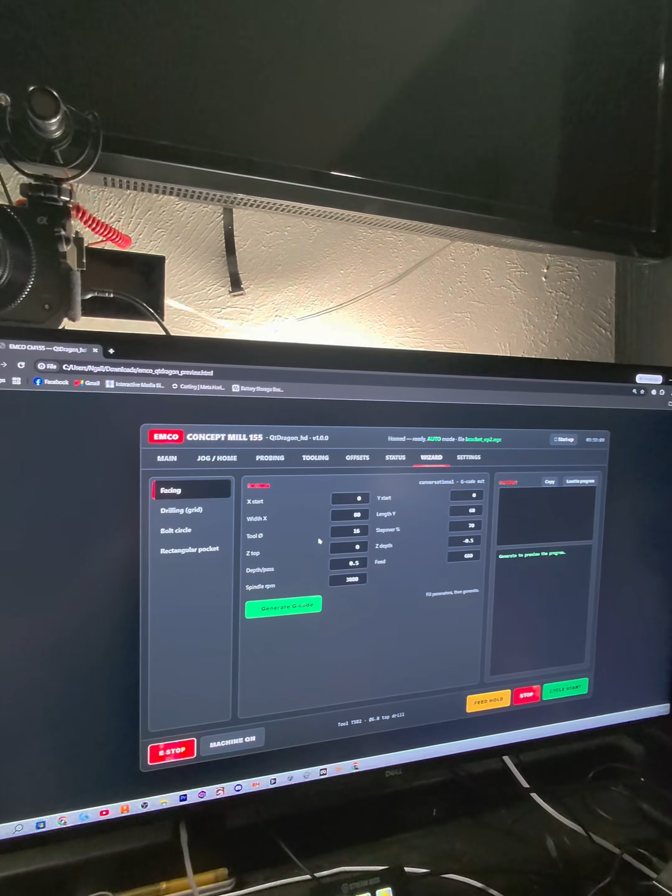The wizard is kind of like my conversational canned cycles - facing, drilling, bolting, that kind of stuff. Settings let me save and restore my ini and hal files and custom hal. Streamdeck, I can customize the buttons here. I don't know how much I'll do this, but if Claude will help build it, then why not? UI, basic info, machine stuff, hour log, network, camera, lube, timer, that kind of stuff.

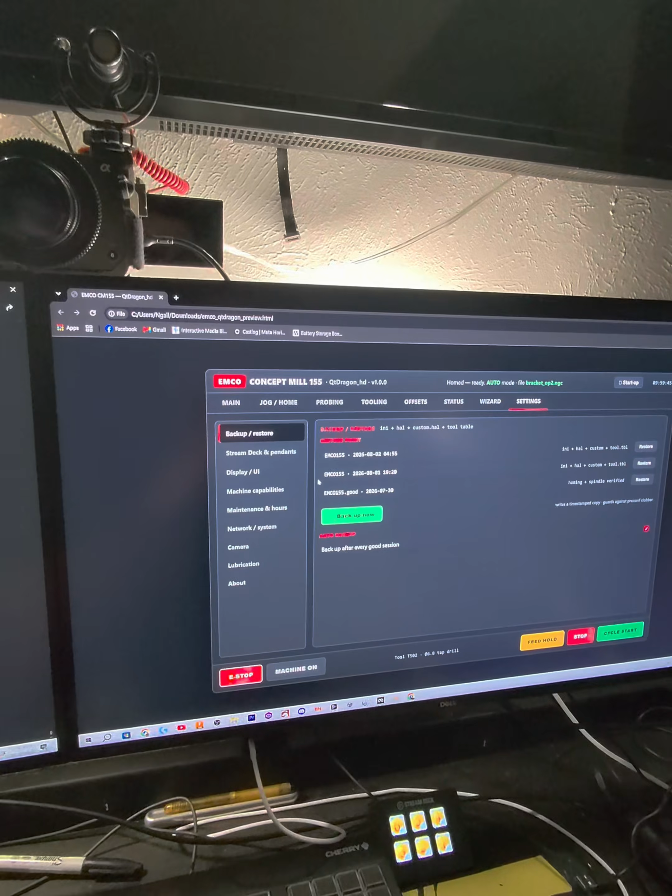So yeah, this is kind of what I'm looking at. This is just kind of a web-based example. None of this is actually built to code yet, but I think it's getting there. This will be pretty cool once we get it built out.

Like I said, I'm going to have the two Streamdecks down here. I'll show you what I'm looking at in one of the next videos, with what the buttons will be on the two Streamdecks and the pendant, which I've got here.

All right, so here are my Streamdecks. This is the regular, the XL, so the 15 and the 32 key, and then this is that StreamDock N1.

You can kind of see this one's going to be my jogging one - that's going to be the left side of that control panel. This one's going to be the auxiliary buttons and features and probing, homing, that kind of stuff. And then this is going to be my handheld jog pendant.

This script that I have doesn't actually change the pages, but there is a page that is just a jogging screen. Right now I can cycle through X, Y, and Z, and then an increment, and that's what this would actually do. And this actually changes on this little DRO up here, and it changes on the DRO in there as well.

So first steps, I'm actually going to strip the work and the feed and the spindle off of that. Just make this one a jogging one straight up with no extra features. Make sure that functions and features work over here, which tentatively they do now.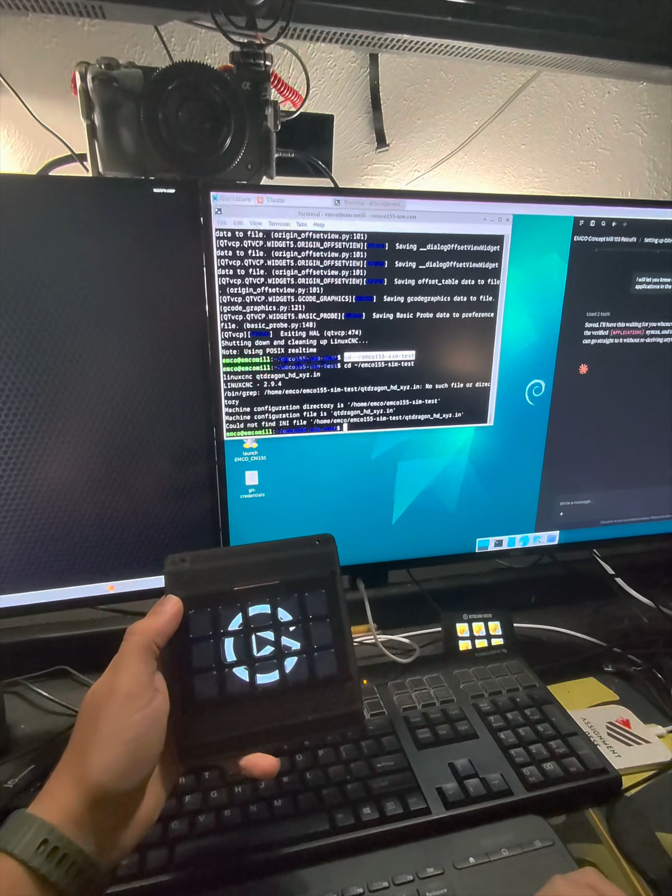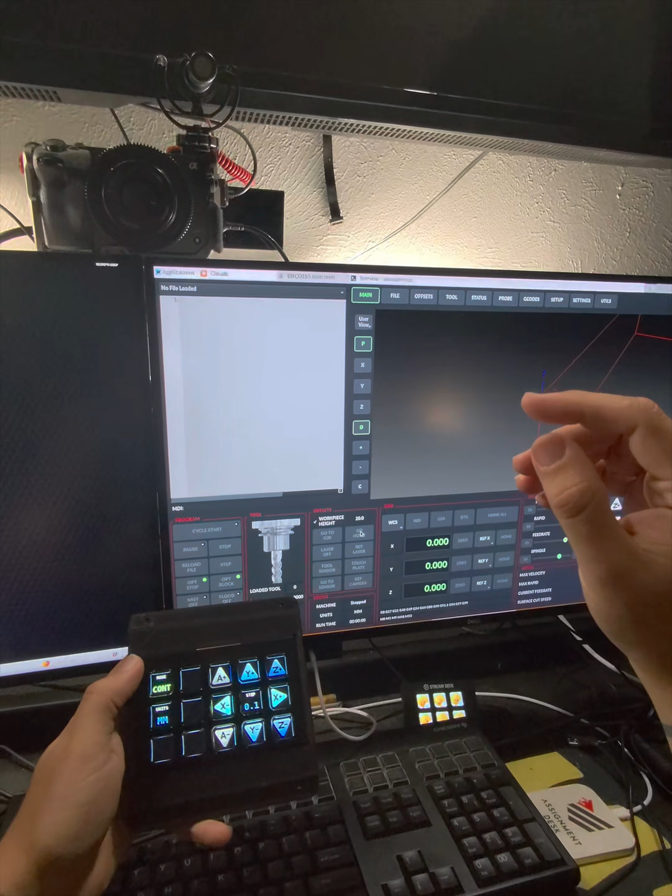If I paste the right thing. So this is running just kind of a test sim of Qt Dragon. I'm starting the reskinning process and stuff like that.

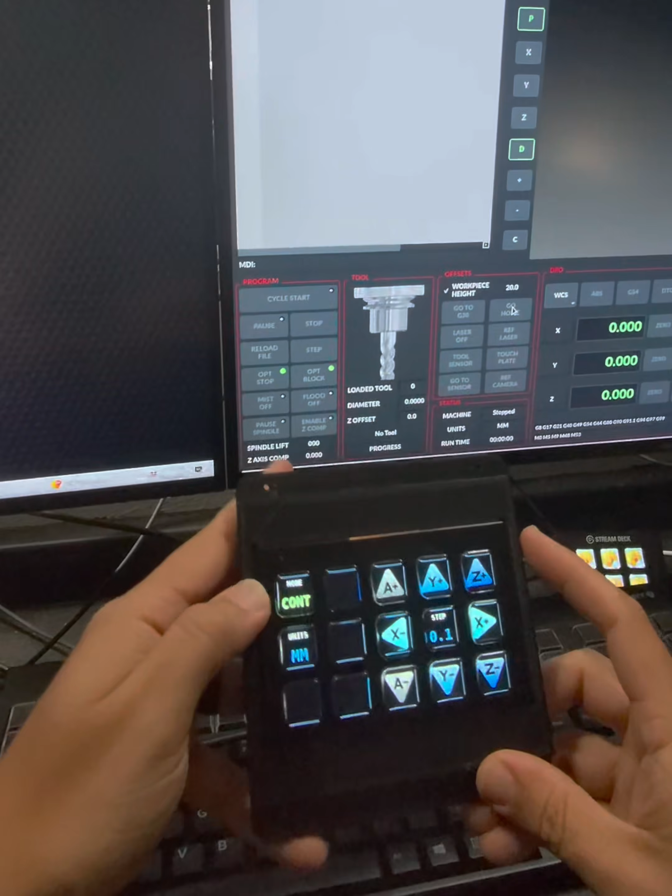But the big thing is I got the Stream Deck now actually working a lot better and slimmed down. So this is the Stream Deck regular. I'm calling this one Alpha.

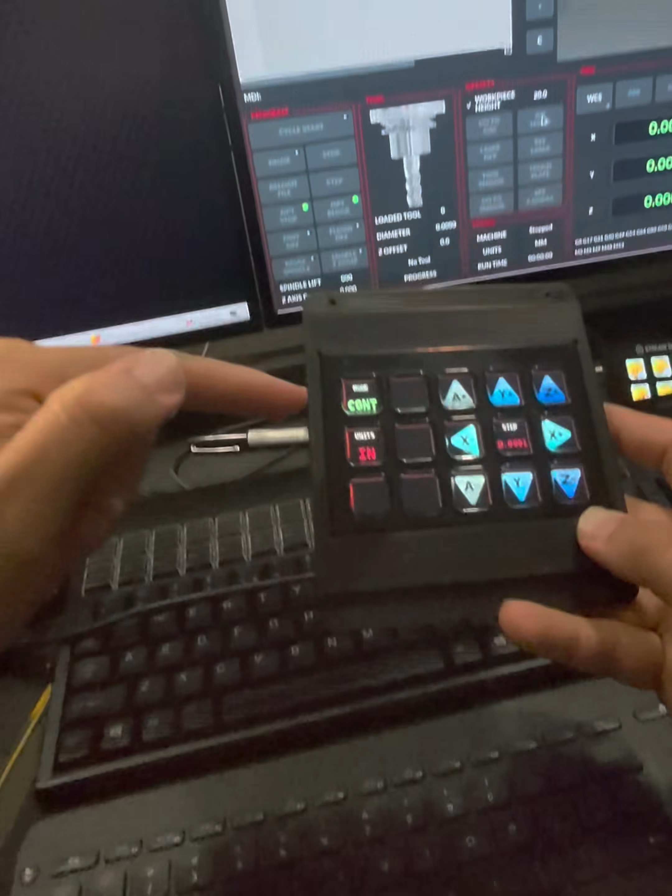You can see I've got step and continuous toggle switch. I've got millimeter inch, so metric imperial. And then you can see hopefully that the little borders around those change to kind of match the coloring convention.

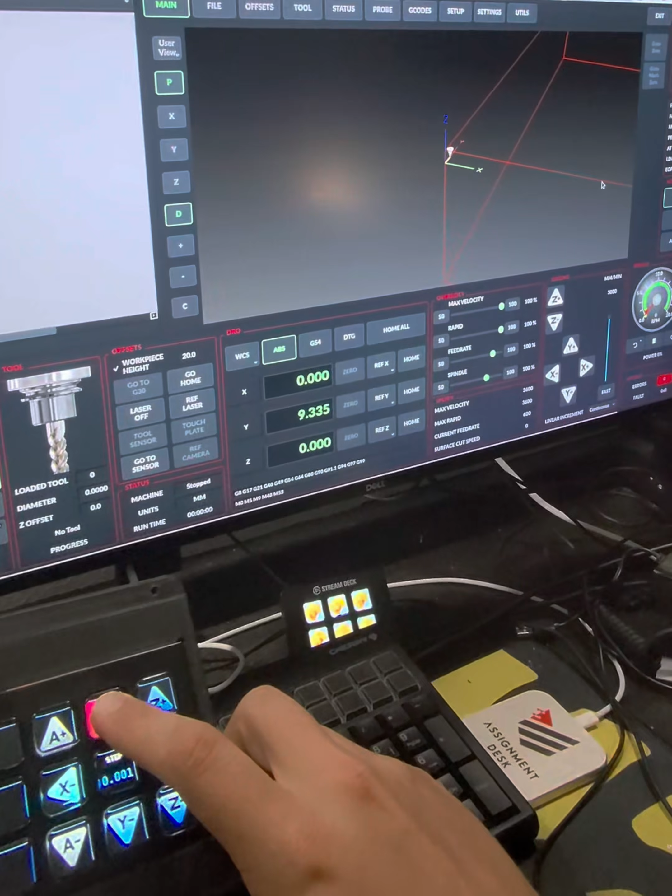And then if I enable the machine, I've got jogging up here. Let me zoom in on that.

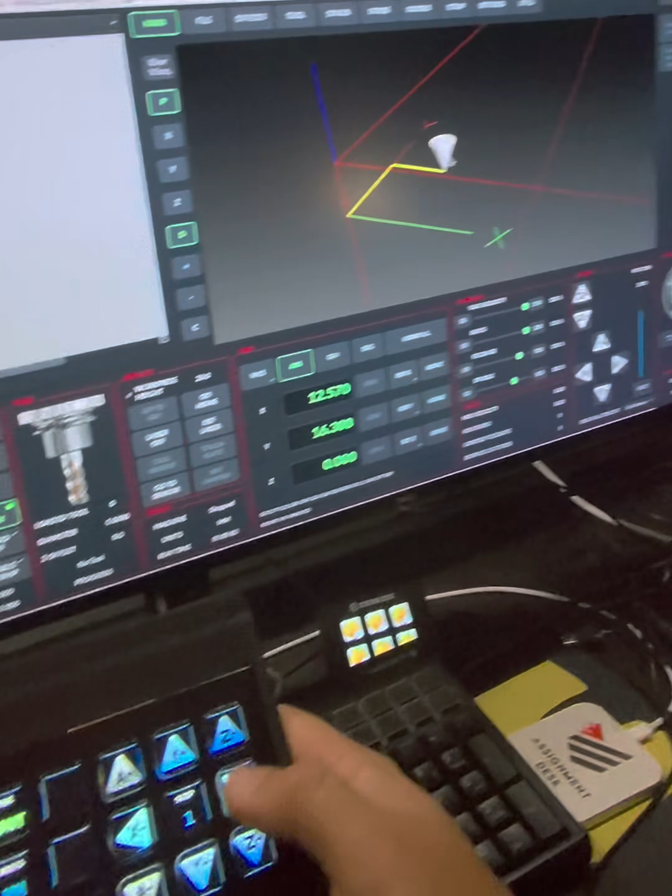Right, so I've actually got jogging, and I can jump the increments, and then obviously if I go step, it'll only do the one step, right?

And then, yep, increments. Yeah, and then I'm working on this color scheme, this gray red kind of combination here. So yeah, that's kind of where I'm heading.

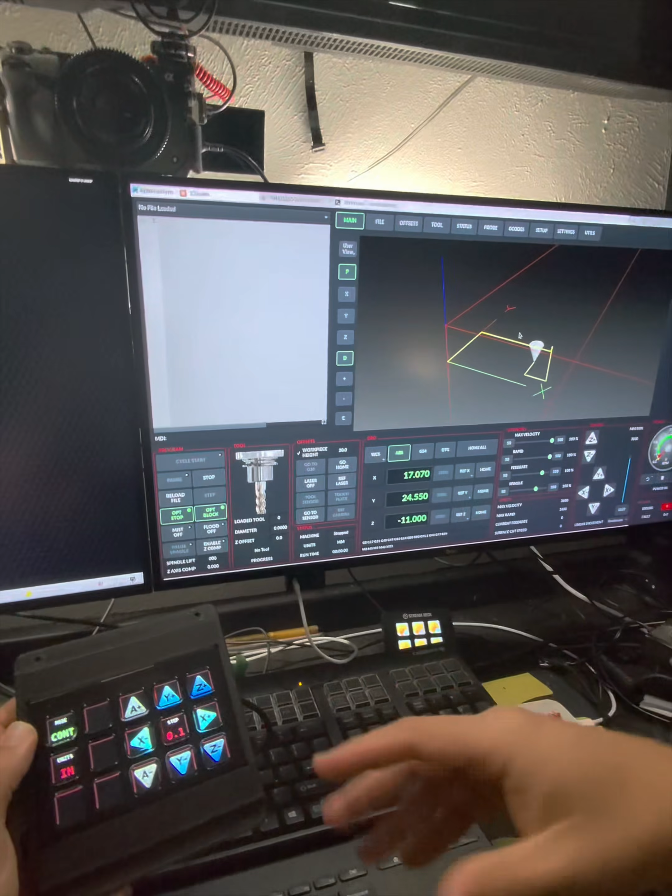The GUI that I had is HTML based, so I'm just kind of playing with that and seeing what I can bring into Qt Dragon.